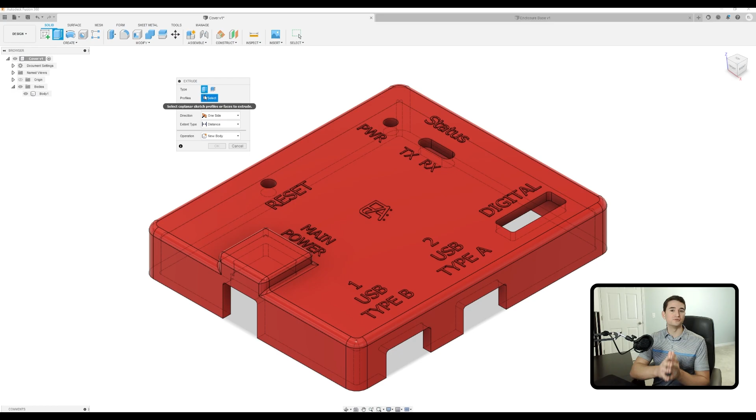Next, we have our Profile section. This is where we can select either sketch profiles or faces within the model to use as an extrusion feature. So let's say, for example, we want to extend the height of all of these walls in one go without projecting any sketch geometry. All we'd have to do is select the surfaces we want to extrude.

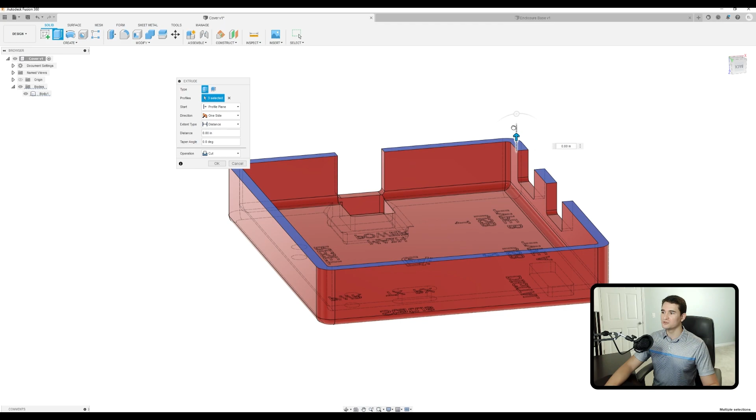Then we can go ahead and set a distance. Let's say I want to bring this up by a quarter of an inch, for example. It'll go ahead and extend that for me. As you may have noticed, we can click and drag this arrow to quickly visualize or position something as required. We can also grab this little button here, and while holding left mouse, move it side to side to change that angle. This is a very useful tool for a quick workflow.

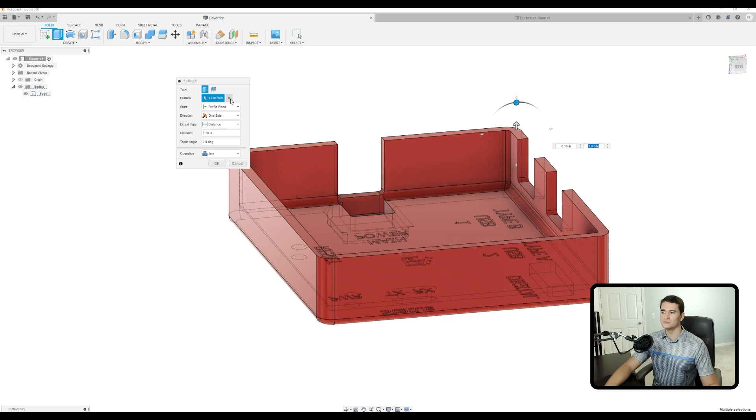Now let's go back to this profile section and deselect all of our selections. We can do this a couple of ways. The first way is to hit this X button to deselect everything, or we can use the Shift key to selectively remove various entries from our overall selections.

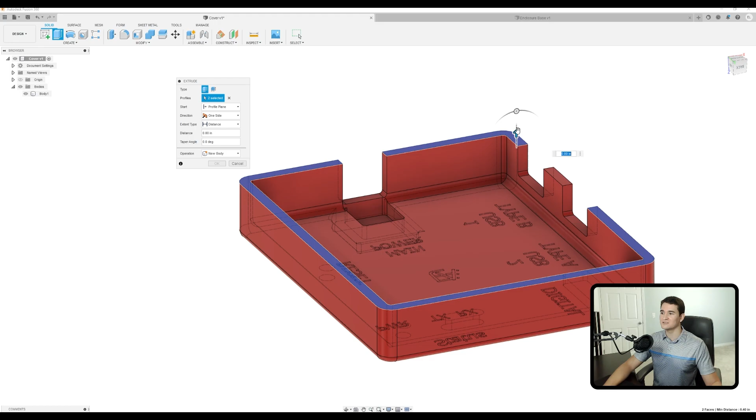For example, let's say we're selecting all of this very quickly, but we accidentally click on this face here. All we have to do is hold the Shift key on the keyboard and then left click that face to remove it while holding Shift. As you can see, that face is now deselected. So when I raise or lower these faces, this face that I did not want to move is unaffected.

Now let's go ahead and select some sketch profiles. I went ahead and created a sketch on this face here. All we have to do with the profile selector active is hover over our profile of interest and select that. So for example, if I hover over the very center of this, it will extrude this region. If I hover over this area, it will only extrude this ring, which is what I want to do in this case. You can also pick up other elements.

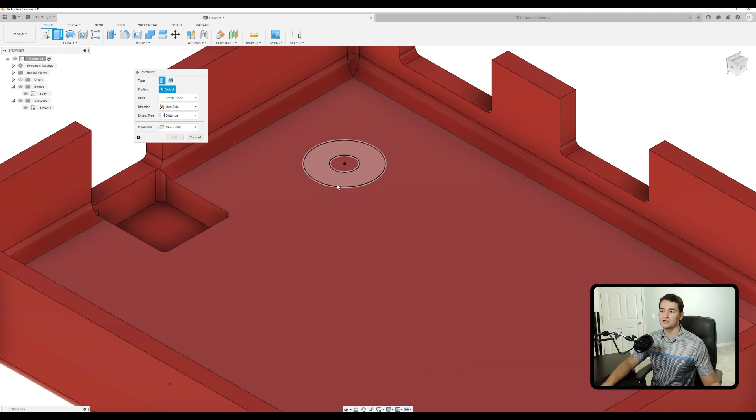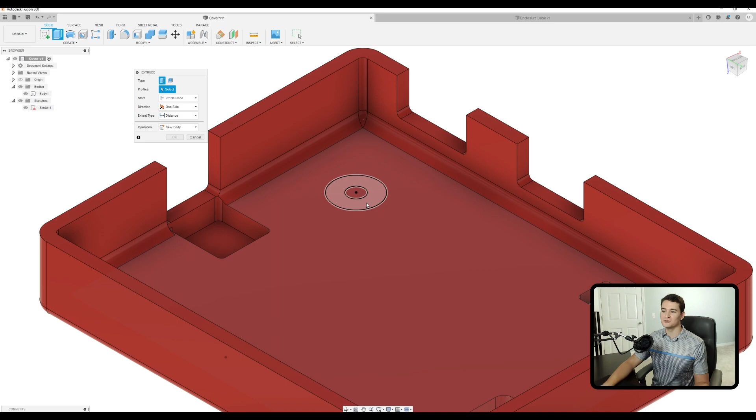So I can pick up an area around it. This can be used in the opposite of what you would expect - I could say I want to raise every other surface with the exception of this one space, and select this area accordingly. But again, I want to go ahead and extend this feature up. So all I'll do is left click in this area, and I can either use the arrow to extend it, or push into the material to cut through it. But let's go ahead and extend it up about 0.25 inches.

Moving down, we have the start area. This area allows us to designate how we want to start the extrude. By default, it's set to profile plane. What does that mean? Well, the profile plane is the plane in which your initially selected profile resides. For example, this sketch resides on this face here, so it's going to start the extrude off of this face.

Now, if I were to sketch some sort of profile up on this edge or just use the face itself, this would be the starting point for that extrude, as you've already seen earlier in the video.

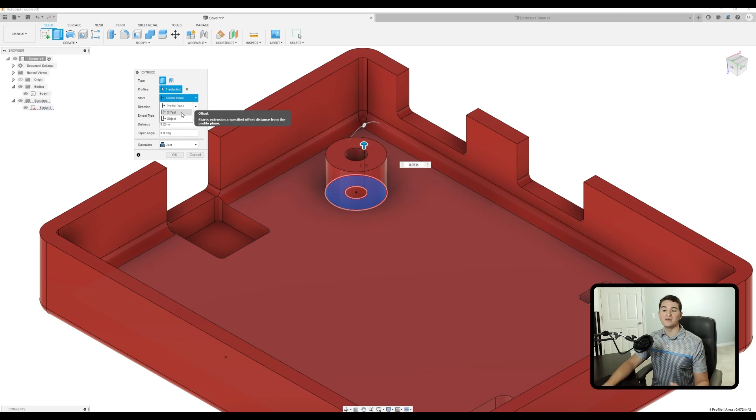Now, our next option is the offset option. The offset option allows us to shift the start point of our extrusion. Let's say, for example, we have this raised feature on the underside of the cover, and we want to use this face here to continue that extrusion, but leave a gap between the old profile and the new one. So we'll select this face here and pull it out some arbitrary distance, which doesn't matter for this example. Now we want to leave a gap between the end point of the previous feature and the start point of this new one, so we'll set an offset value.

Let's say we want to set a gap of 80 thousandths of an inch, so we'll type in 0.08. As you can see, we have created an 80 thousandths of an inch offset between the plane we initially referenced for the profile and where our actual extrusion starts.

Our next start option is the object option. How this works is we select a reference plane or face, and that will designate the start point for our extrusion. In this example, we'll select that same face we did for the offset option by going up to Profiles, clicking the Select button, and selecting our profile of interest. Now we want to select our object of interest, which in this case will be this face here. So essentially, we're designating our reference face as our start point for this extrusion.

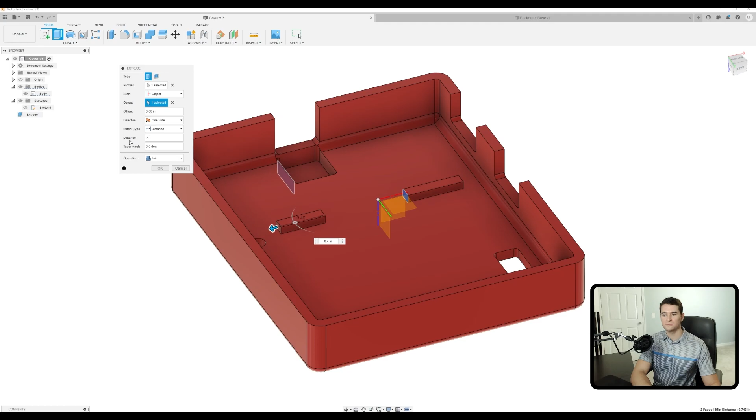So now all we have to do is set our distance for the extrusion. We'll say 0.4 inches. And there we go—now we've got our extrusion that starts at our reference face.

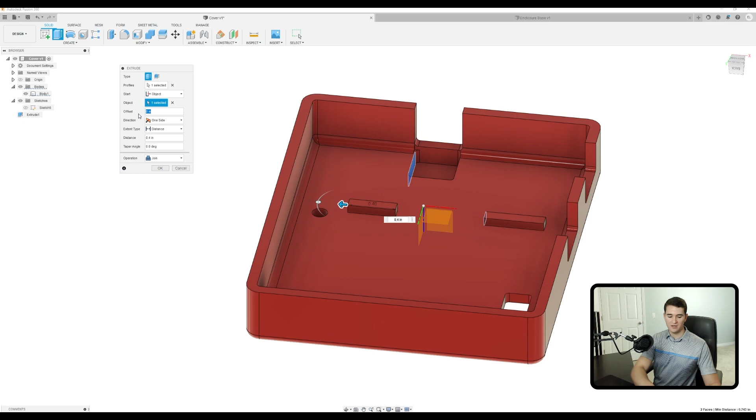Additionally, we can also specify an offset when using the object start option. In this case, we have it starting with this reference face, but let's say we want to offset it backwards from that reference face by 0.2 inches. All we have to do is go into this offset field and type in 0.2 inches, and as you can see, it offsets this feature backwards by 0.2. Of course, if I put a negative sign in front of that, it'll reverse the direction and go the opposite way.

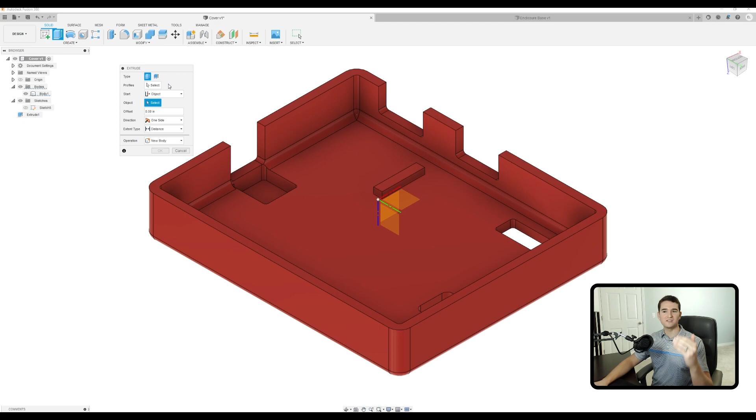On a side note, I'd like to point out that it's important when using options like the object option that you are specifically selecting the appropriate selection button as required. So when I'm selecting profiles, I want to make sure I have this button activated, then I can select my profile. When I select my object to reference the start point of this extrusion off of, I need to make sure that this is selected first. If I wanted to use this face as my reference face but forget to select this button here, it'll pull that extrusion up to that face.

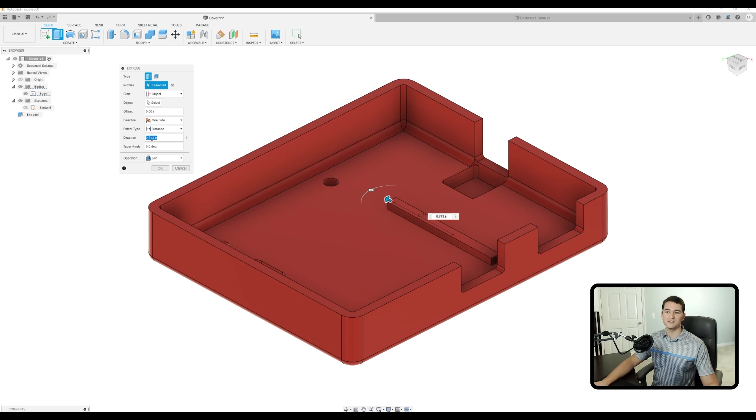That's not really what I want to do. What I want is to set a distance for this, and select the start point, which is this face. This time around, when I made sure I selected the correct button, I've gotten the output that I wanted. So just make sure that whenever you are using a command with multiple selection options, you are paying attention to which ones are currently active.

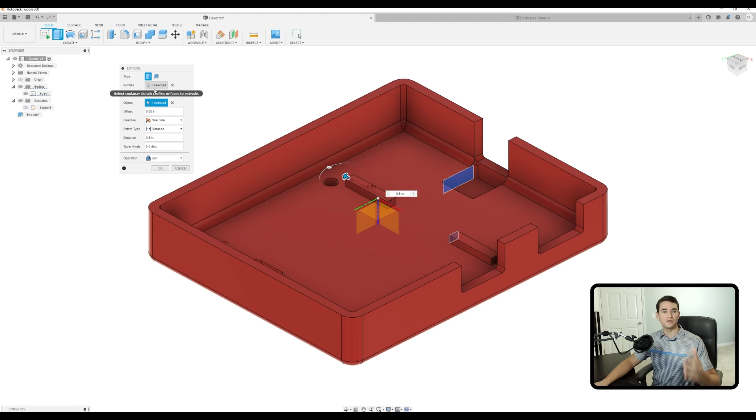Moving down, we have our direction options. These options allow us to specify how our extrusion behaves in reference to its start point. One side basically says that from our starting plane, we're only extruding to one side.

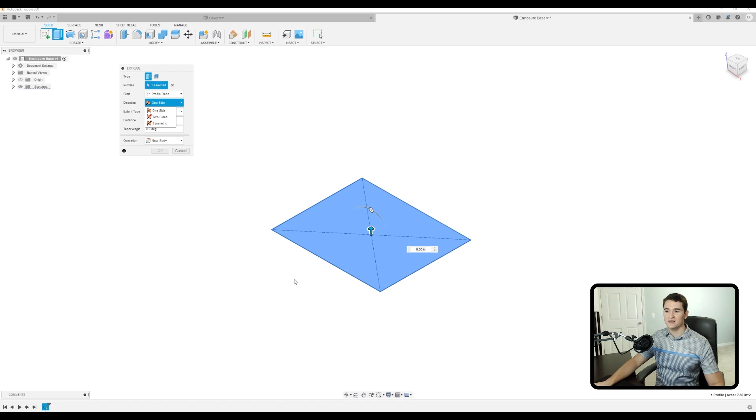So we're going in one direction. In this case, we are going to extrude upward. Let's go ahead and set a distance in here. As you can see, it only goes to one side. Now, we'll set this to two sides.

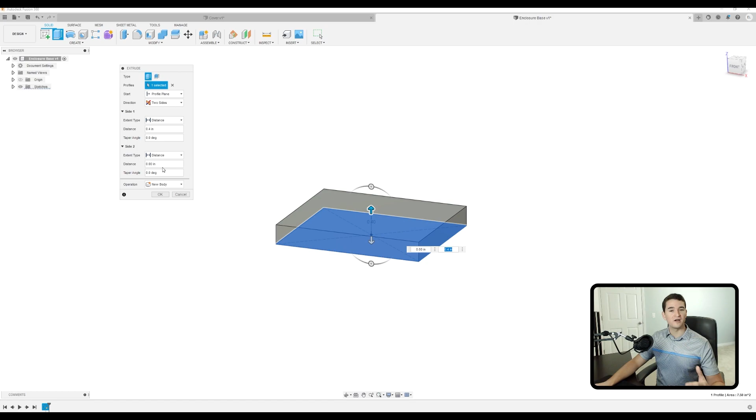As you can see, we get a couple additional options here for dimensions. We can use these like in all the other cases, or we can specify an exact value. Let's set a distance of 0.25 in this field. As you can see, it's extruding downward by 0.25 inches, but it's still retaining that 0.4 inches in the opposite direction. And of course, we can also set independent taper angles.

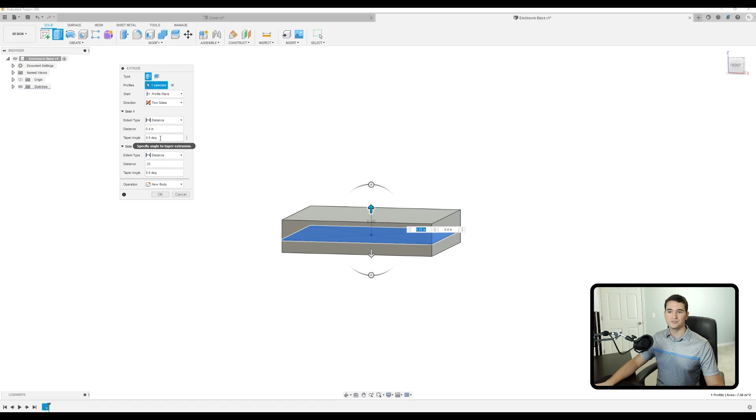Let's say we want this one to be 0 and we want this one to be 5 degrees. As you can see, we set a slight taper angle for this second side.

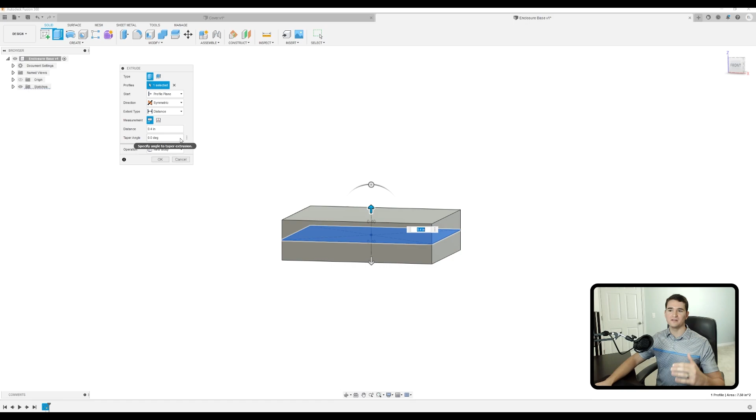Our final direction option is, of course, the symmetric option. This is similar to the two-sided one, but it extrudes symmetrically about that initial plane, where your profile resides. So, of course, we can also set the distance off of a half length. This is basically saying that I want it to extrude to a distance of 0.4 inches on either side, and then you would have to manually total those two values up to find the overall length.

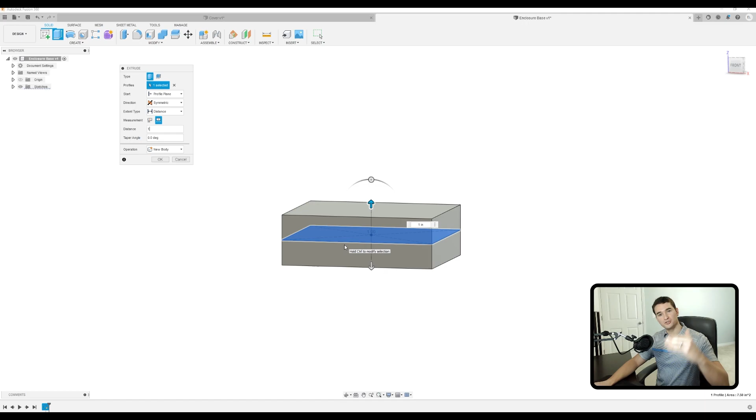You can also specify the length off of the whole length. So if I want the whole length to be 1 inch, it's going to extrude up from the initial plane by 0.5 inches, and it's going to extrude down by the other 0.5 inches.

Moving down, we have our extent type. The extent type allows us to control how our extrusion terminates, where it ends up and how it does so. For all of the examples leading up to this point, we've been using distance, where we set a distance value for the extrusion.

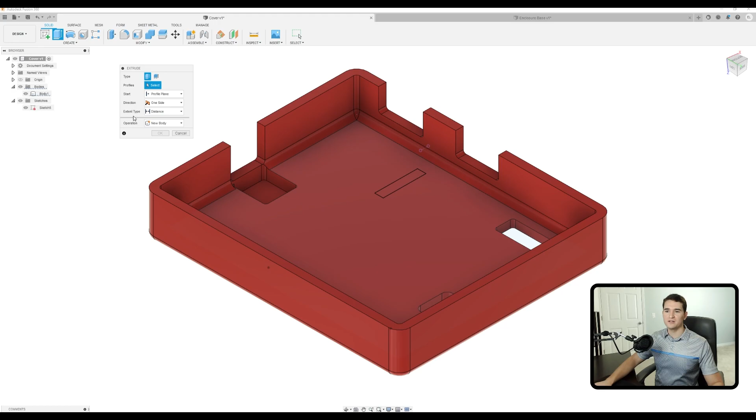Let's go ahead and take another look at that. I'll select this rectangular profile and we'll set a distance here of 1/2 inch. This is just going to extrude that up by 1/2 inch.

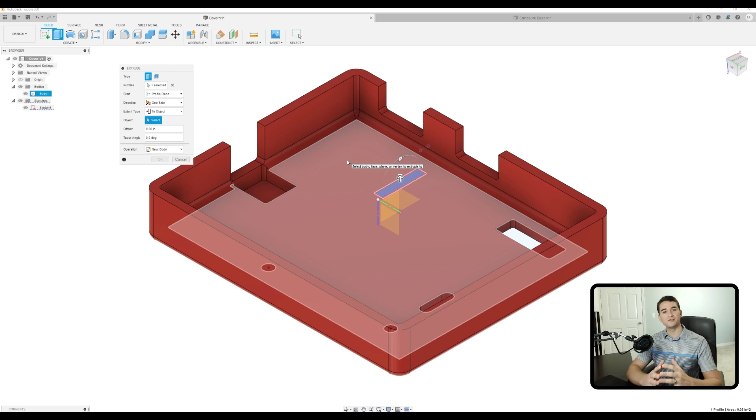Next, we have our to object option. Like our start option where we had our object option, this allows us to control the termination of our extrusion at a particular reference plane or face. So let's go ahead and set this face as the maximum height for this raised feature.

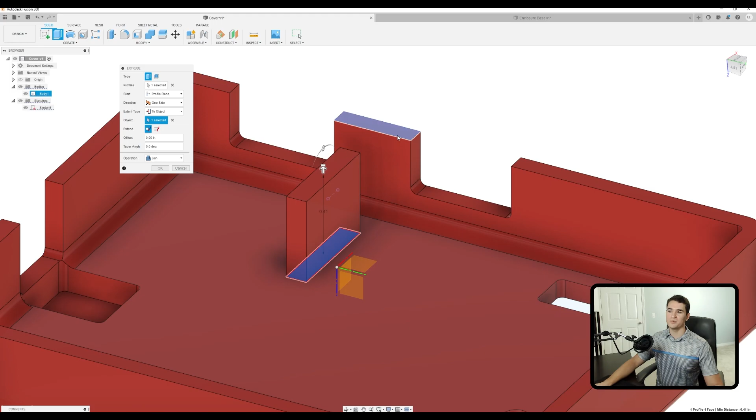All we have to do is make sure object select is already pre-selected, and we go ahead and click on that face. As you can see, it brings that extrusion up until it reaches that height. This is great for controlling multiple dimensions that are relevant to one another without having to go ahead and change multiple distances manually.

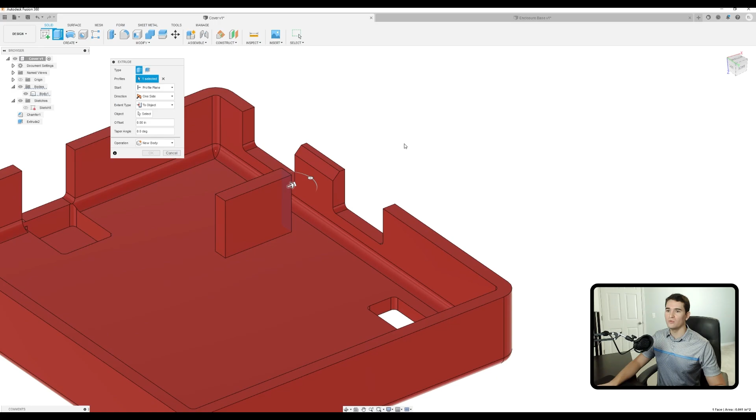Now let's take a look at the extend options within the to object selection. We'll go ahead and select our profile of interest. In this case, we want to extend this raised feature up until this wall. After I've already selected my profile and then selected the object that I want to extend this to, we get these two additional options that pop up.

By default, we have to selected face. This is exactly what you saw before, where we brought up the top of this extrusion to the max height that we specified based off of our reference face.

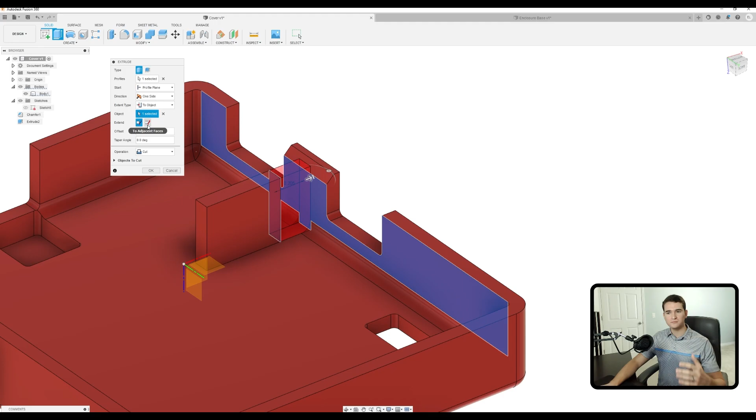However, we also have this option, which is to adjacent faces. So I want you to pay attention to something here. As this gets extended up, we see that our part is flush with this, but we have this little protruding corner. Let's say, for example, we wanted to extend this up until this face here, up until this edge here.

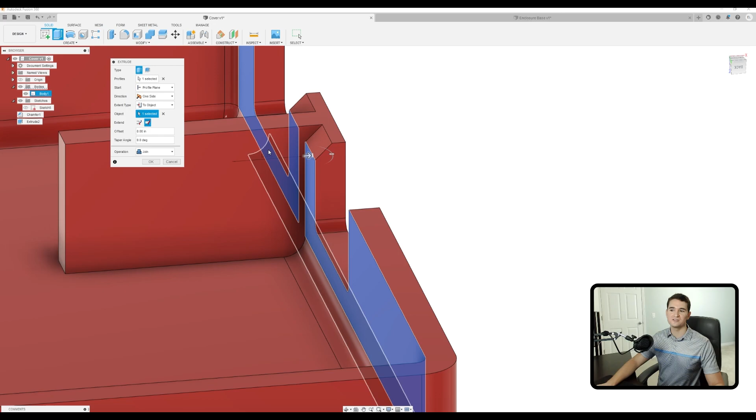And to do so, we just click to adjacent faces. What this is going to do is extend that extrusion up until your reference face or plane, but then it'll go just beyond that to any adjacent faces. This is a very quick way to create a little bit more of a complex rib feature here on the edge of the enclosure.

So of course, after we have that all set, we can also specify our offset values and our taper values, just like many other options that you're going to see for this particular command.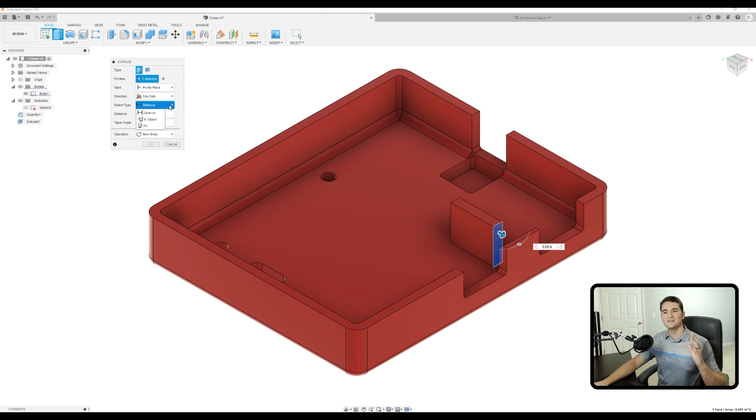The final extent type we'll be discussing is the All option. All extends the extrude through all visible bodies. In this case, I have this face selected as my profile, and I want to extend it to the end of the visible body, which is this face here. So let's go ahead and select All.

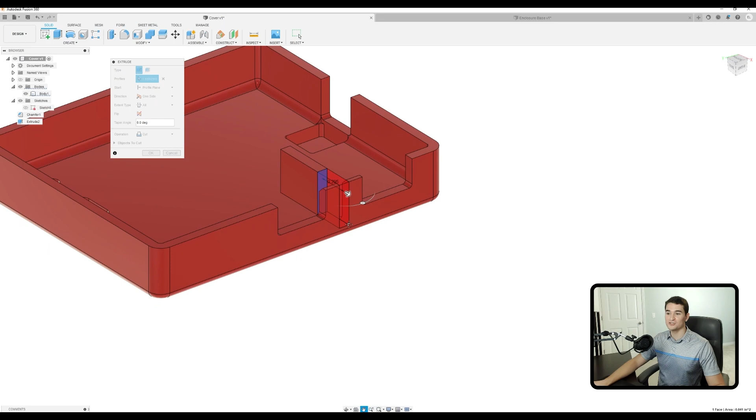As you can see, it extends it all the way up until this face. Note that it's assuming I want to remove material, so it's set the operation to Cut. We can change that easily to Join, and it will add material rather than remove it. We can also flip the direction by clicking the button in the Flip section, which extends the extrude to the end of the part in the opposite direction.

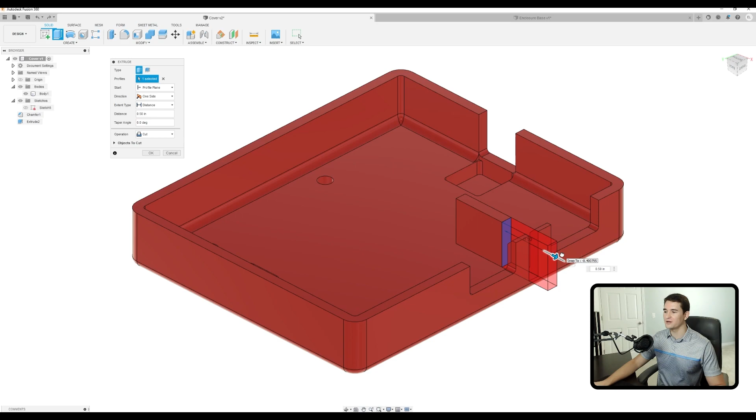Now let's take a look at the various operations available when executing an extrude. We'll select this front face as our profile and extend it out this way. As you can see, the Operations section pops up and defaults to Cut because it thinks I want to remove material.

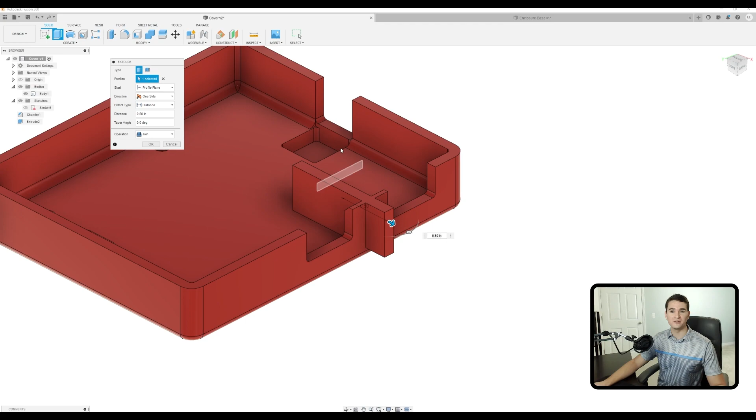Cut removes material from the solid body that your profile passes through. Join adds material and joins that new material with the existing material of that body. Next we have Intersect, which keeps only the material that coincides with that cross-sectional profile you've extended through—in this case, just that sidewall.

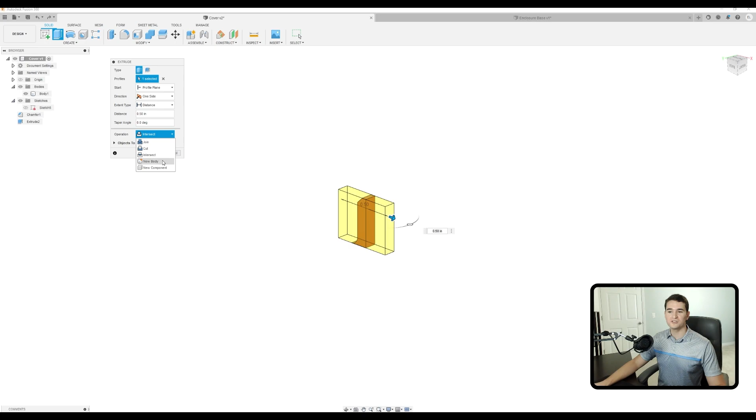Then, of course, we have New Body. New Body will extrude that profile but classify it as a new solid body. Let's go ahead and try that. We'll click OK, and in our Bodies folder within the browser, which you can expand by clicking this arrow, you can see we now have two separate bodies, so I can hide each one independently.

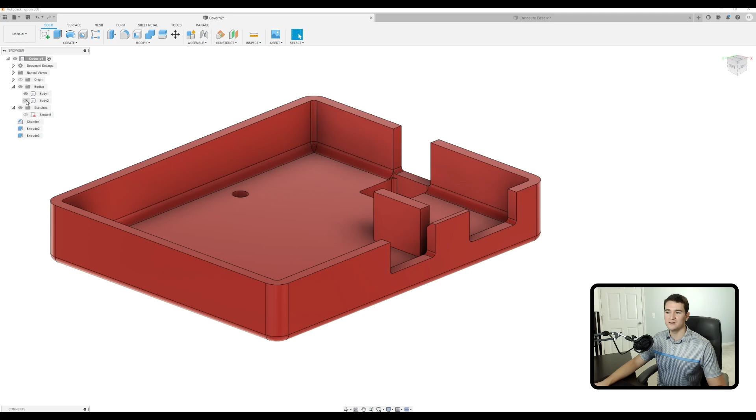Our final operation type is the New Component option. New Component creates new solid geometry, but houses it under a separate component. When we click OK and go to the browser, you'll notice a new component pops up, and if we expand that, we see our own separate Bodies folder, distinct from the cover at the top level.

You can activate the various components independently by hovering over the name and clicking the little button that pops up next to it. Now we see our newly extruded body separate, in the foreground of the rest of the existing part. Let's go back into the cover.

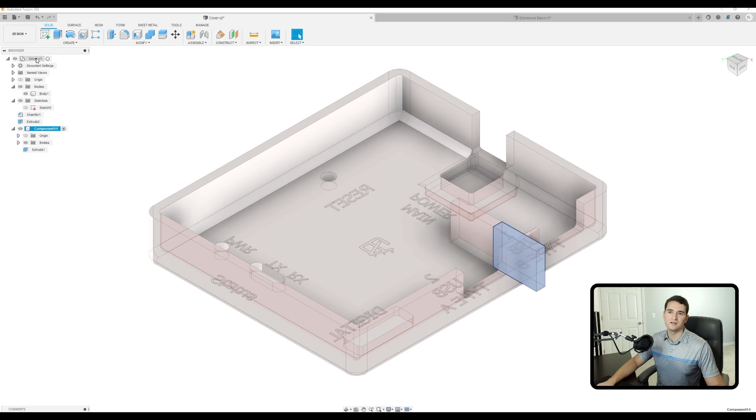Let's try to remove some material from the cover but preserve this material here. We'll go to Extrude, select this face, and pull it all the way through. By default, it looks like it wants to remove the material, and it will.

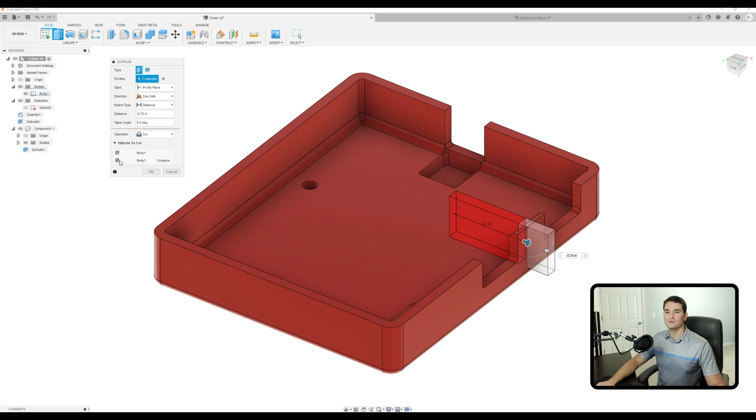If we expand the submenu called Objects to Cut by clicking that arrow, we have two checkboxes. The first is the original body housed under the cover top level, and the second is the new component we created. If we uncheck that, it won't remove the newly created geometry. Let's click OK—as you can see, it removed the other raised feature but preserved the feature from that secondary component.

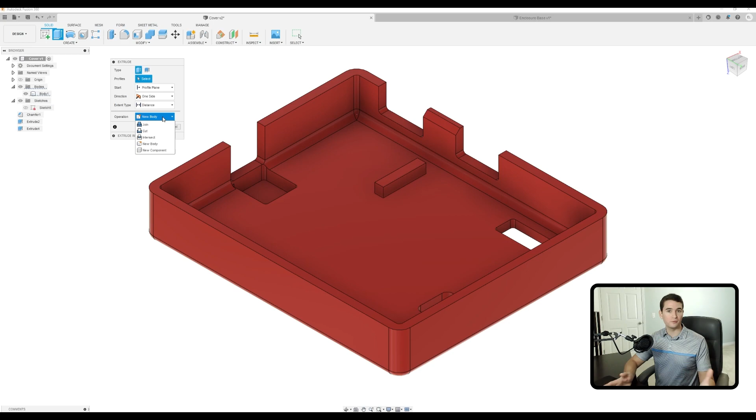I'd like to point out that when we enter the Extrude menu, the operation options are already available to us from the start. This is a great way to control what actually happens before it starts making assumptions about what we want to do.

Now let's take a look at the Thin Extrude option. We'll go into Extrude, click Thin Extrude, and before we select any profiles, I want to point out that we can select either open or closed profiles for this.

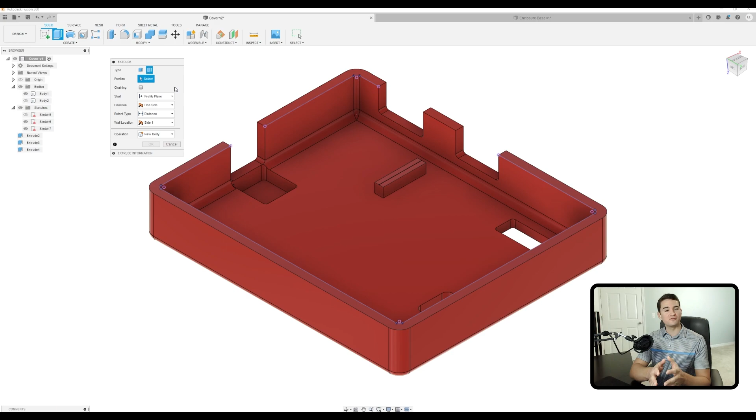So what you'll see here in the model is that I created a sketch in which I projected the edges along these curved areas of the cover. It's the interior edges that I've projected, and we will be using these profiles to create a wall that acts as a lap joint. We'll specify a wall thickness off of these curves that we've projected.

Now one thing I want to talk about is this chaining option. By default, it's usually enabled. When it's enabled and we hover over a profile that has multiple segments tangent to one another—in this case a straight line with an arc, another straight line, another curve, and so on until it terminates here—you'll notice it selects the entire profile together, chaining all those individual segments because they're connected and tangent to one another.

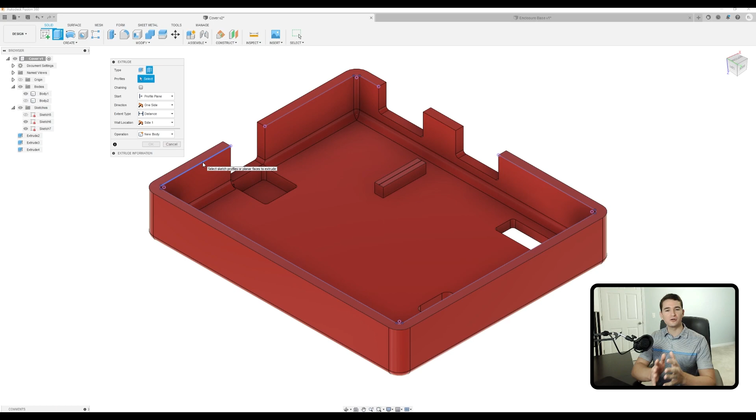Now if we deselect that and hover over that same segment, you'll notice only that straight line is selected. So with chaining deselected, you'll have greater control over what you're selecting. Depending on your use case, this is a pretty handy tool.

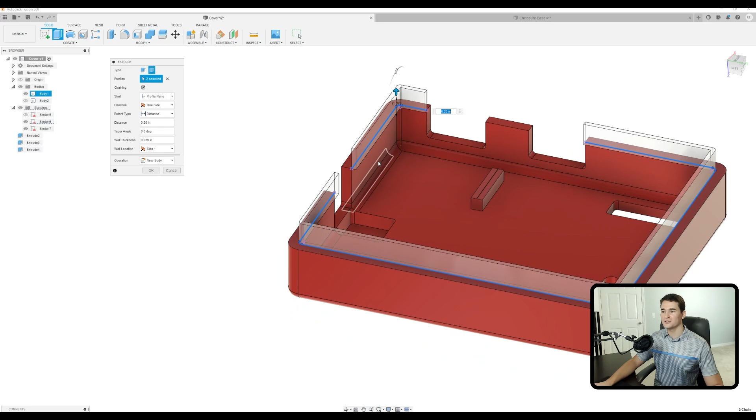Now let's go ahead and re-enable that. We'll hover over that profile, left click, and then click on this one as well. Now we can go ahead and raise this wall up a little bit. So now let's take a look at what we have here. As you can see, we have this thin profile that originates at that sketched line or that projected line.

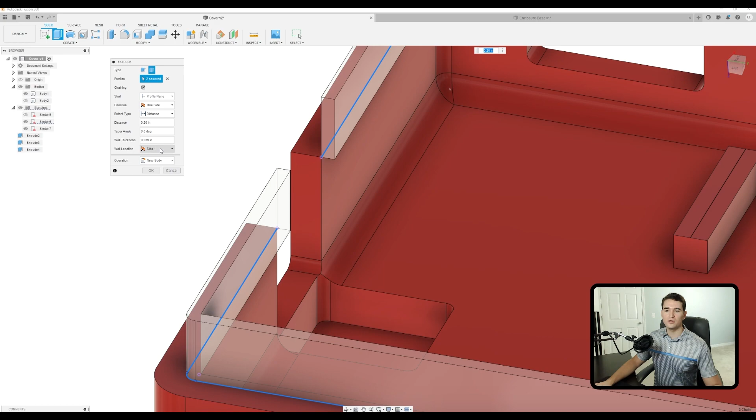One thing I want to point out is that in the current state, this extrusion is just hanging off of the projected edge. We actually want to flip that to the other side of this edge. To do so, we can go down to the wall location option. We're going to skip over all these other options because we've covered this already in the regular extrude command. Going down to wall location, we can set this to side 2. By default it was set to side 1 and it was hanging off, so we set it to side 2 and it flips it to the other side of that profile. Now we can also set this to center.

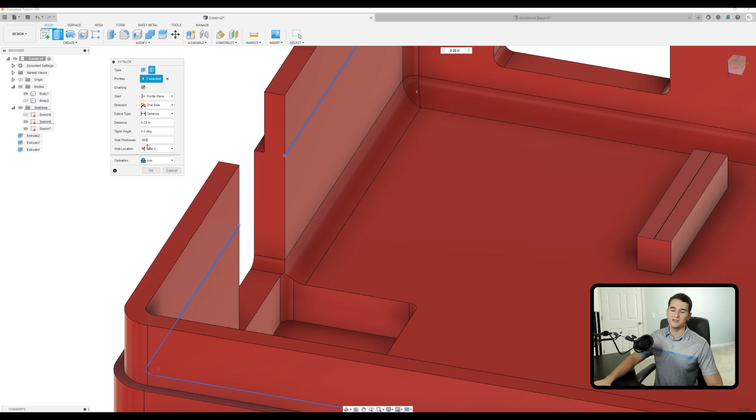What this does is it centers up that wall thickness on the projected line itself. Now let's set this back to side 2, and let's change this wall thickness to something a little thicker than 39 thousandths of an inch—we'll go 60 thousandths of an inch. As you can see, it thickened up that wall a little bit. Now on our base, we can tweak the wall thicknesses between the base and the cover to create a proper lap joint so that we don't have any void space between the cover and the base itself.

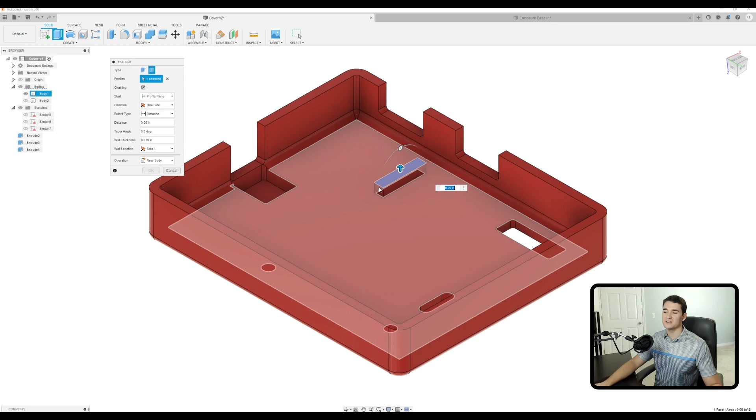Now we can also select closed profiles with the thin extrude, so let's do so. We're back in thin extrude. I'll select this top face here, and what it's going to do is create a wall thickness generated off of these edges along this top face. Now we can go ahead and draw this extrusion up, and as you can see, we have that wall thickness running around the profile we selected.

Now let's go ahead and change the wall location to side 2, and that's going to offset it to the exterior—going outward from the profile we selected. Again, side 1 moves to the interior of the profile, and center just centers up that wall thickness on our selected profile.

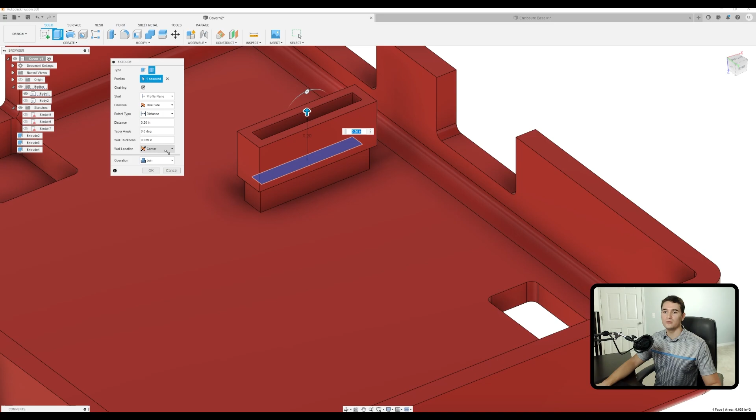Now we can change this back to side 1, and we can actually perform a cut operation on this as well. So we just pull this down into the material, and as you can see here, we have removed material around that profile that we selected.